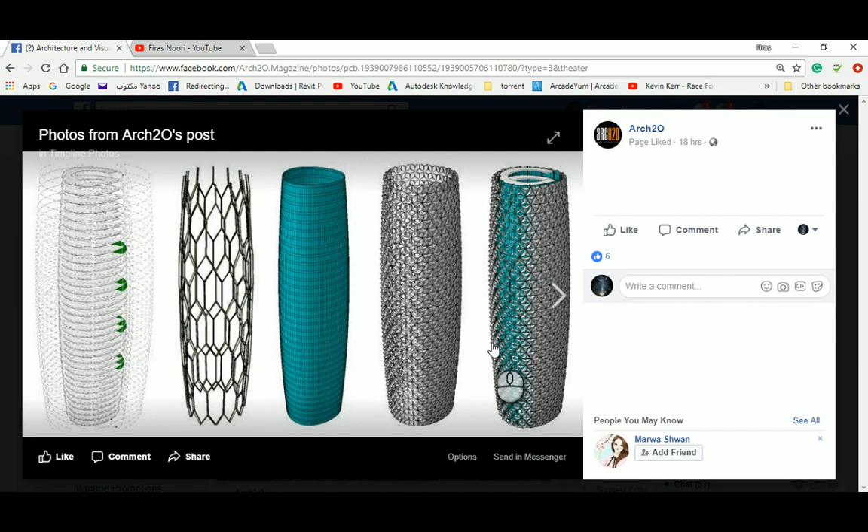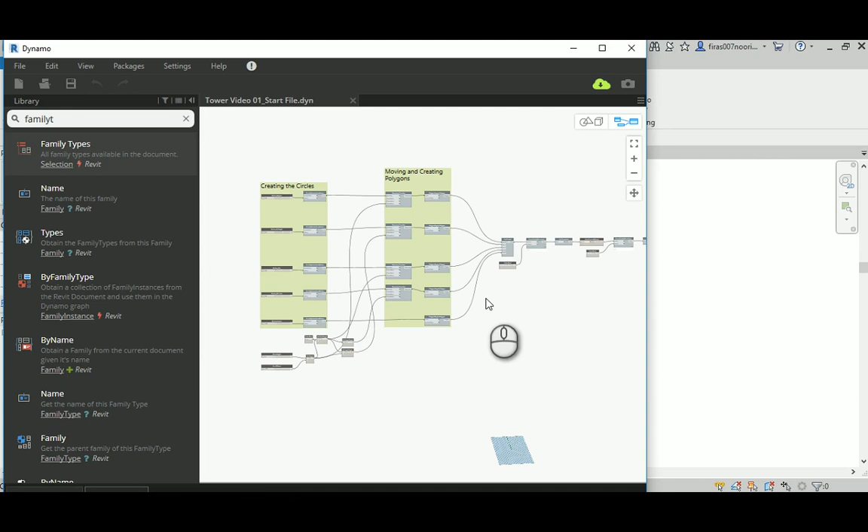So subdivision, again, if we come back to Revit, could be very complicated, and it's very annoying actually if it doesn't go well. In today's example, I will start with the previous work that I did. So if I open this in Dynamo, it's a basic tower that I had in the couple of videos that I've done, and let me just run that quickly. So that's the tower. And I ended by making this as a solid by loft.

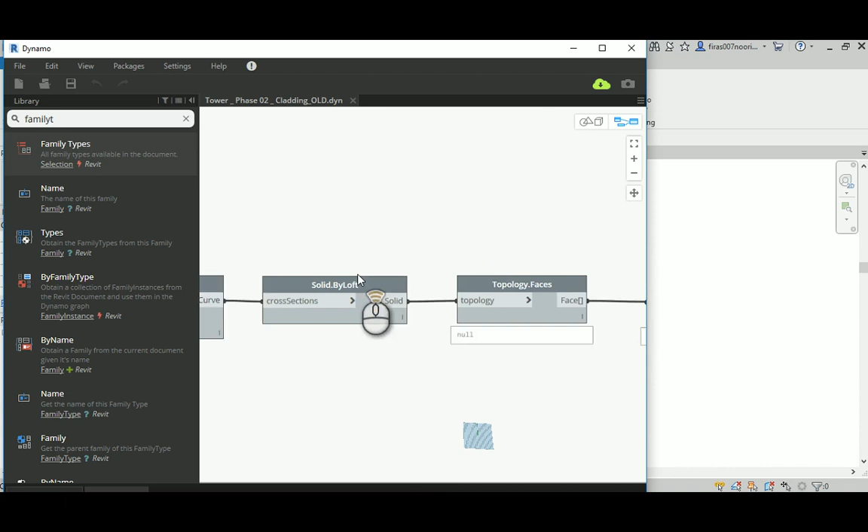So before I go ahead and show you paneling and dividing that, I need to show you the previous method, where we depend on topology. So that's the node for the solid, and then we added Topology.Faces, and then from the faces we took the surfaces, and then we used the drop list, and then on the surface we used panel quad, and divided it.

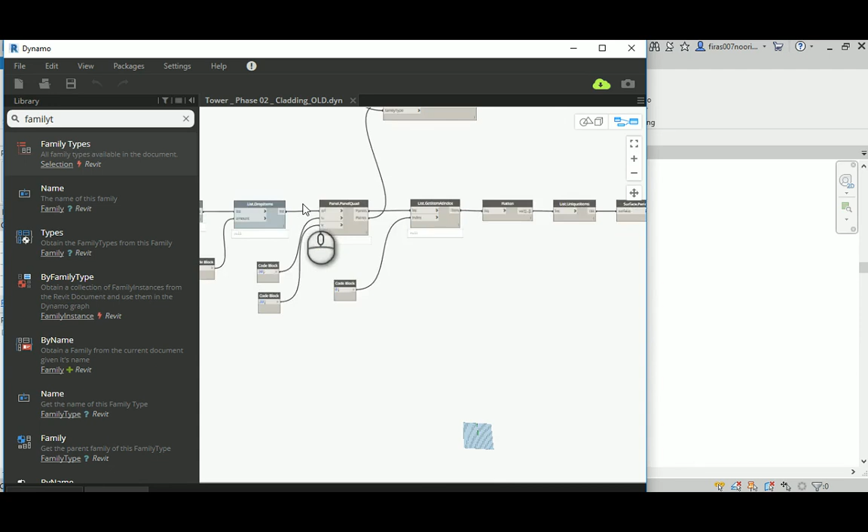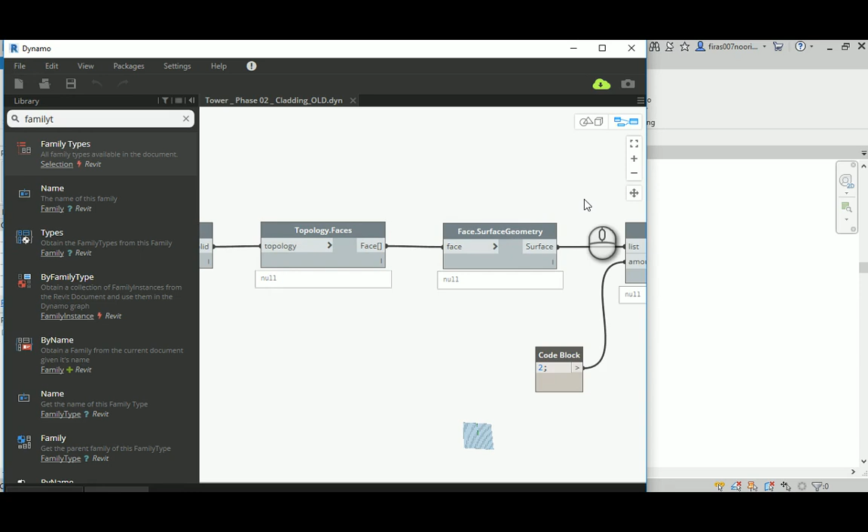So I depended on this in like 4 or 5 videos, and showed you how to take from the solid the faces, and from the faces the surfaces, and then deal with the surfaces by doing the paneling. So if you want to do paneling, there are several ways. So let me show you this way.

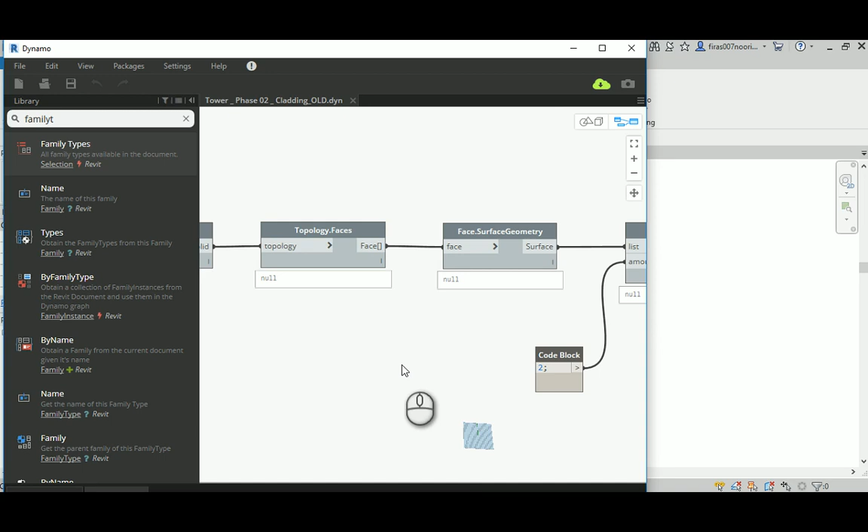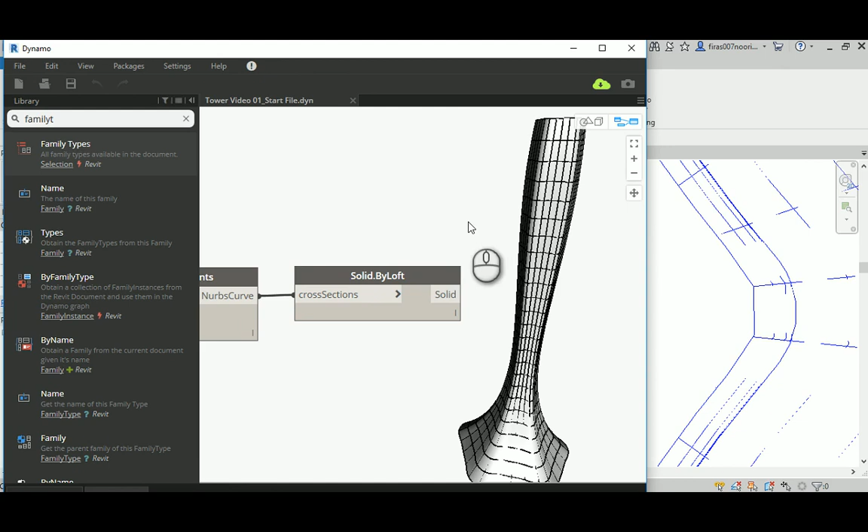I'll start with the file that I showed you. This is just a solid by loft. I'll run that. It's a really good idea to keep it on manual as long as you are pushing elements from Dynamo to Revit. It would be smart not to make it automatic, because it's going to cause a serious delay. If you're working in the Dynamo environment, you can keep it on automatic. Now let me add something new here.

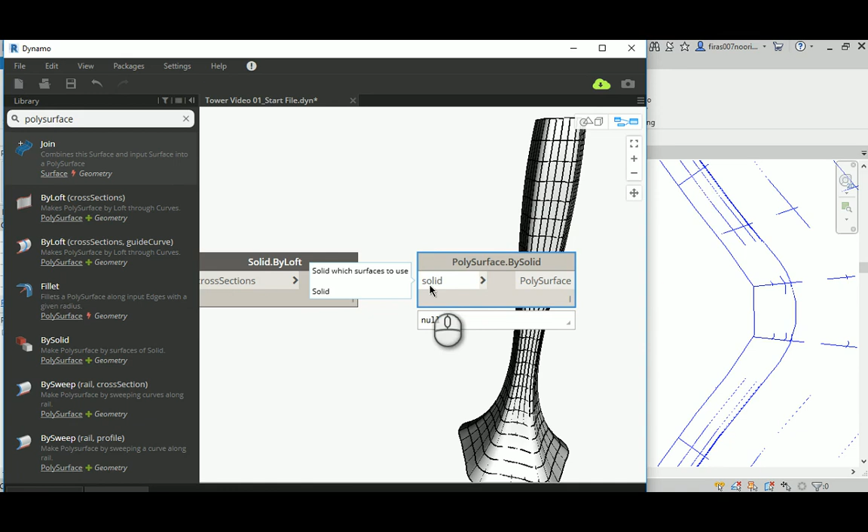Let's go for a poly surface, and that one, if you have a look, it's gonna take your solid and get the poly surface out of it. So the input is the solid, and it's gonna give you a poly surface. So let's run that, and by creating the poly surface for this solid, it's actually gonna make 3 surfaces: one for this curvature, one for the upper face, and one for the lower face.

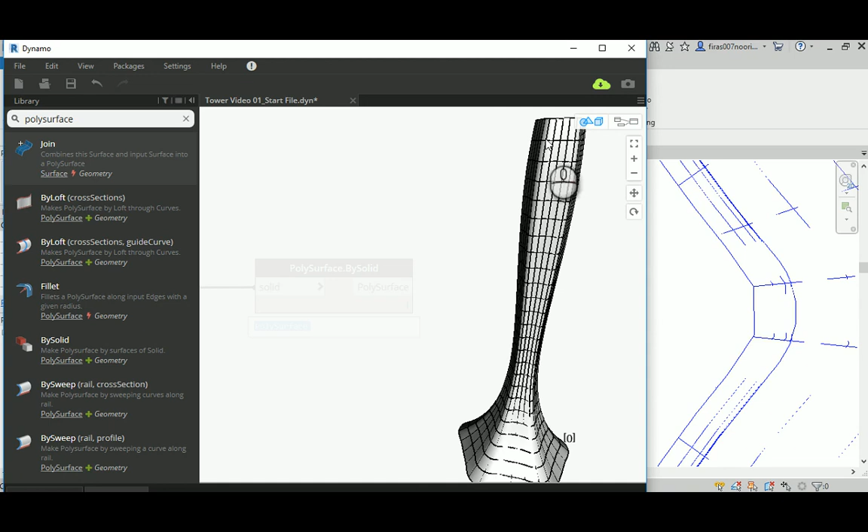But the problem in this, let's open that. This one is basically the whole thing, the whole surfaces, the 3 of them, which is the upper one, the lower one, and the base. So we don't want that, as we're not going to divide the top and the bottom surfaces. So we need to get this poly surface into normal surfaces.

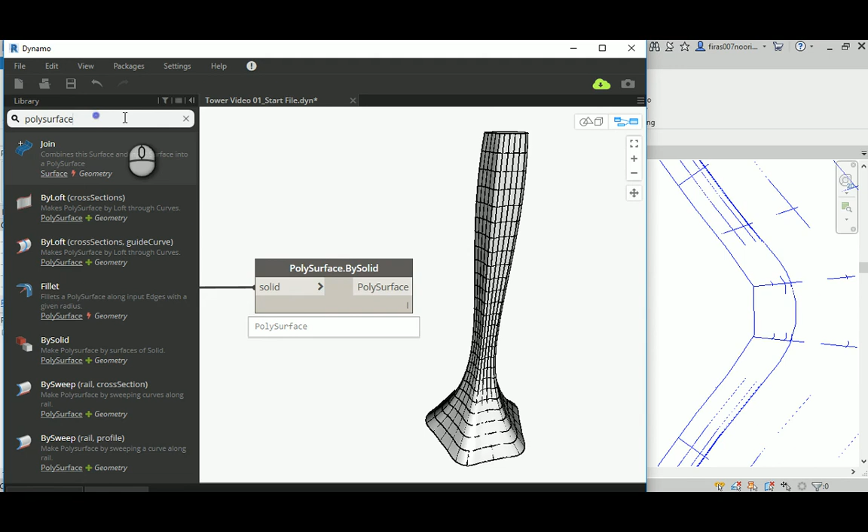So in this case, I'm gonna add again PolySurface.Surfaces. This is gonna take that poly surface and allow me to divide it into the normal surfaces that I need, which is technically here 1, 2, and 3. So let's have a look if we are going okay. See, that's number 3. That means so far so good.

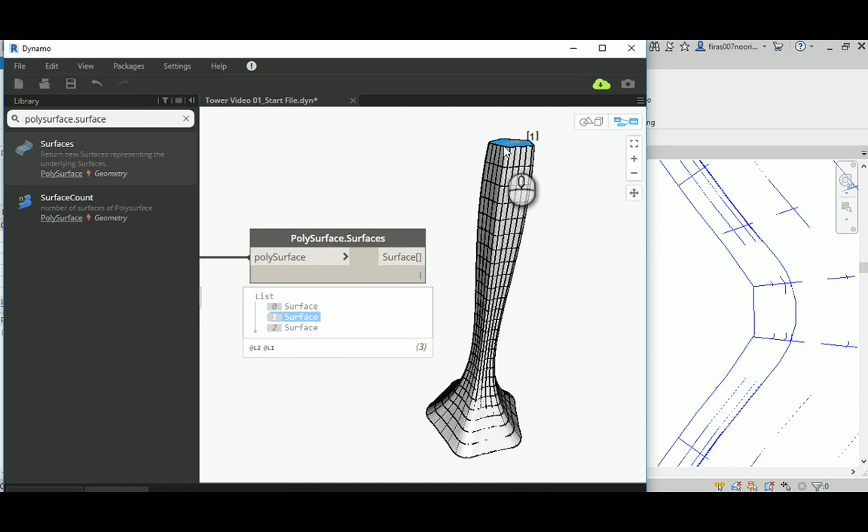So just test that. Let's select this one, which is the cap here. This one is the top, and this one is the surface that I need to divide. Now be careful. If you click on those and you don't see things, it might be a good idea to go back and cancel the preview of those, and that allows you to see them better. And that's again number 2. That's the one that I want.

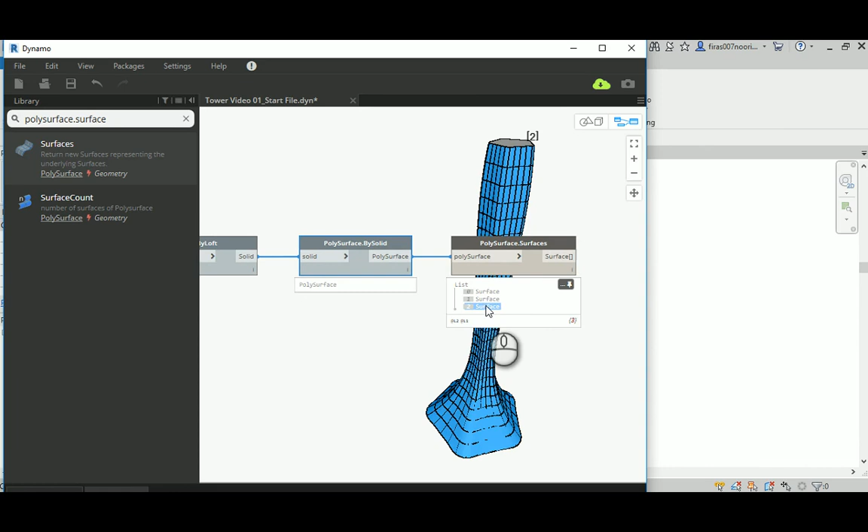And remember, all the divisions you see here, I just added them for the modeling's sake. So you can go ahead and turn them off, and those too. So in the actual understanding of surface work, that's what you have in Dynamo. That's how Dynamo thinks about it, and that's the surface you are going to divide.

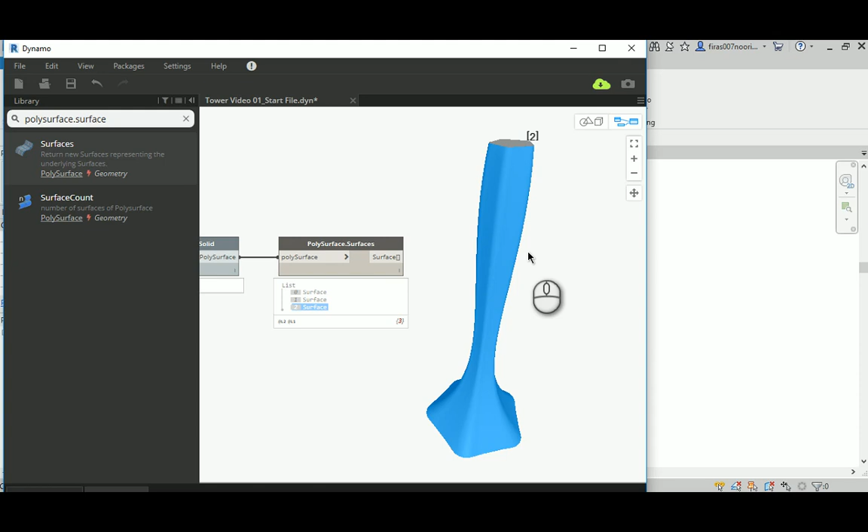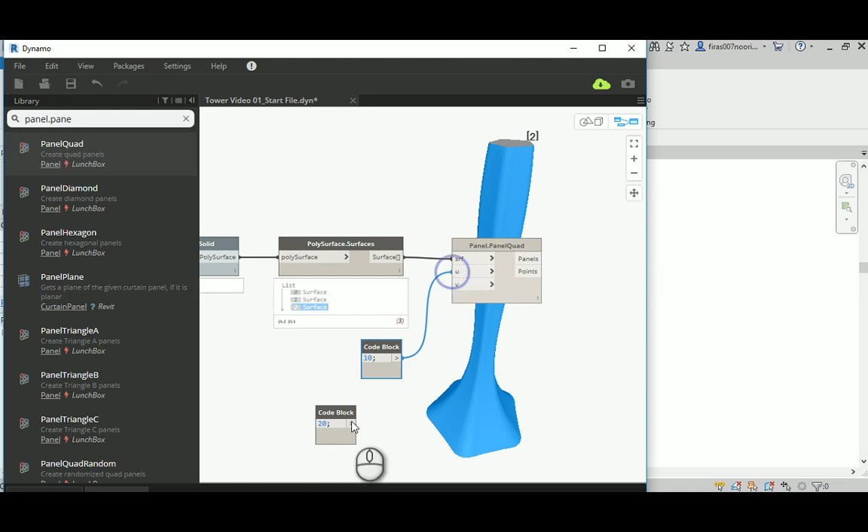So let's do that. And again, I'm gonna use Panel Quad, and it's really easy. I'm gonna take this guy here, the surface, and probably I'm gonna need 10 here and 20 here. So that's the 10, and that's the 20. Now if we divide that, it's gonna make that into smaller surfaces, 10 in the U direction and 20 in the V.

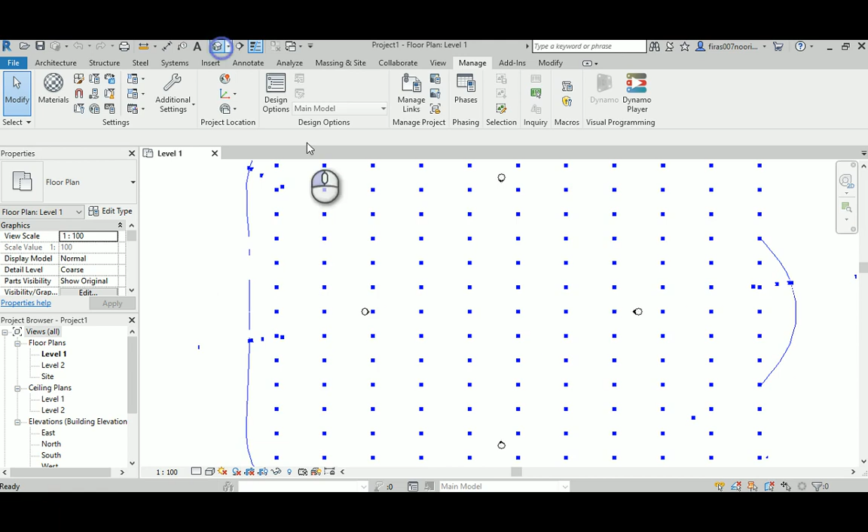Don't go ahead and add too much, even the value that I added. If you don't have a really good machine, you can go smaller, and I'd really advise you to do so. Anyway, let's have a look. So again, when we divide that, you can see that a mess is a mess. It divides that surface, and that surface, and that surface, because it's 3 surfaces. It doesn't recognize that we want only this one, and that's normal.

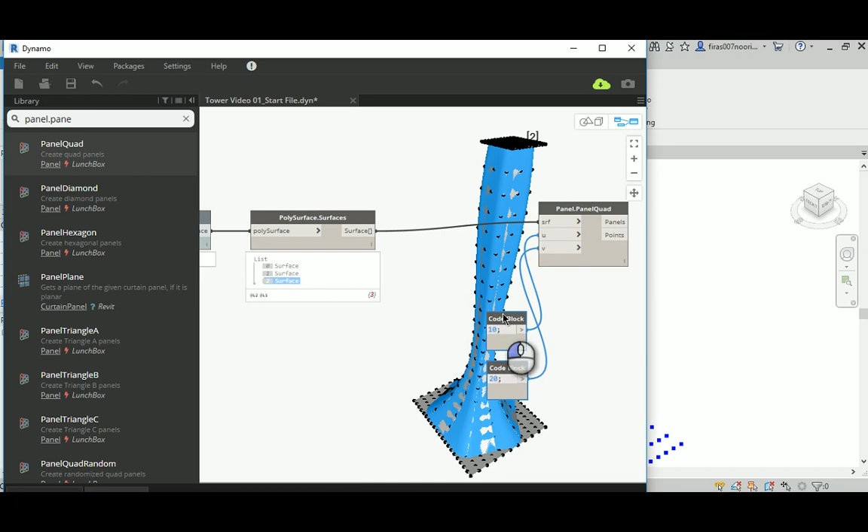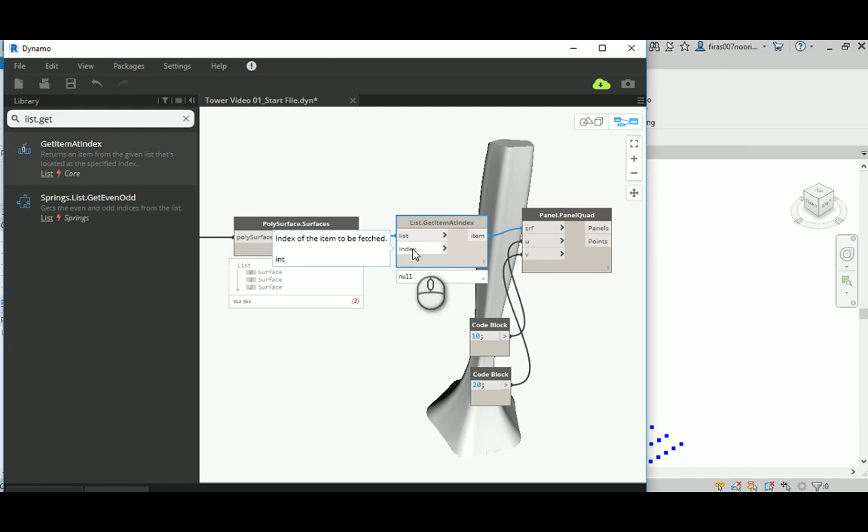So let's push that aside, and let's pick only one surface, which is the second one that I selected here. And I'm gonna go List dot, sorry, GetItemAtIndex. So I will take this here and give that to that one, okay? And the one that I need is the second, so I'll just write number 2 here. Now before, let's just turn off this. Now we run.

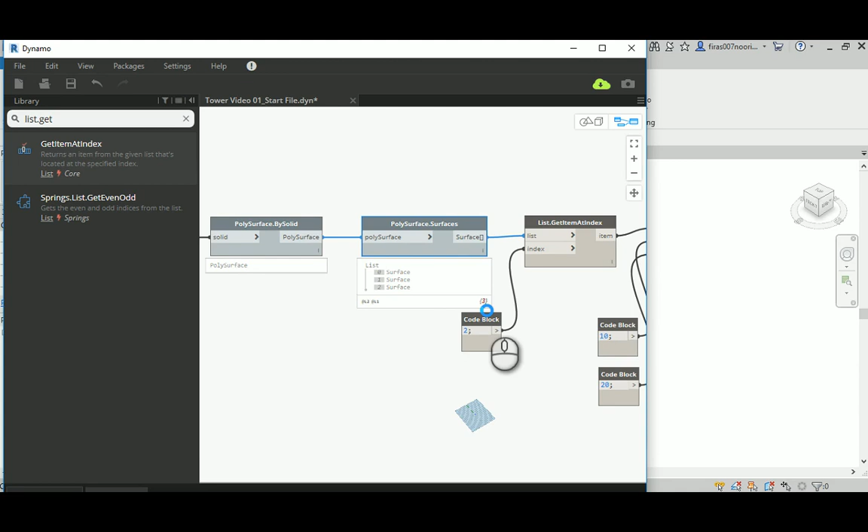In this case, I'm gonna deal with the second surface, which is the one that I need, the vertical one, and Dynamo will ignore surface 0 and surface 1, and that's actually what happened here. So that's technically what we need. So again, I'm gonna go back, turning those off. That means we selected just this guy, and you see those empties, the caps. That's technically the right thing to be done.

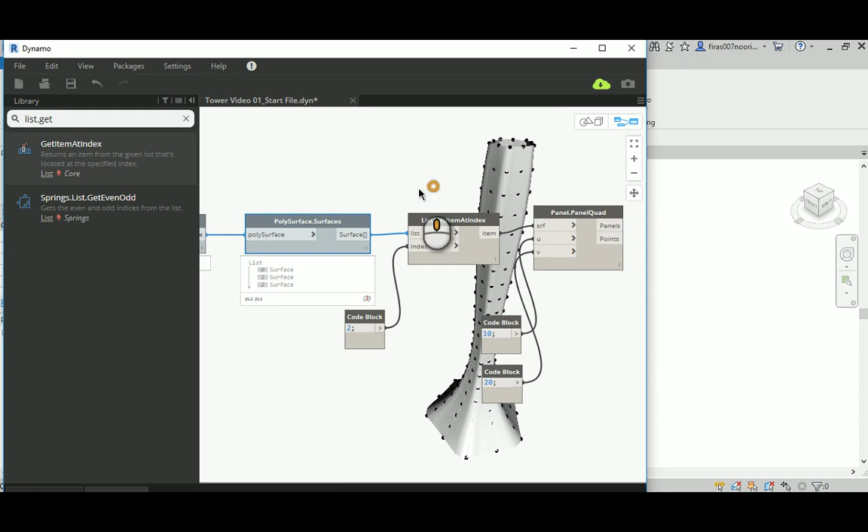And now, if you look, by accident, when I select the panel, I can see there are 2 surfaces. One, the NURBS one that we selected right now, and the other one is the result from the Panel Quad, the divided one. So just turn off or cancel the preview for this one. That's what you want, the paneled one. So that's the realistic one.

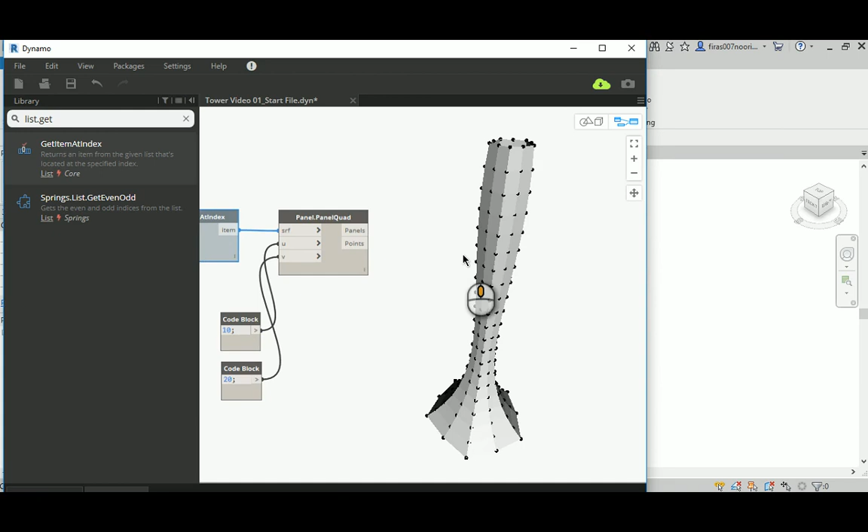You see that smooth curvy one, you're never gonna get it until you increase those insanely high. So again, that's for testing purposes. You can go ahead and increase those carefully after you finish the work. So now we managed to divide that, and we have our panels and our points ready.

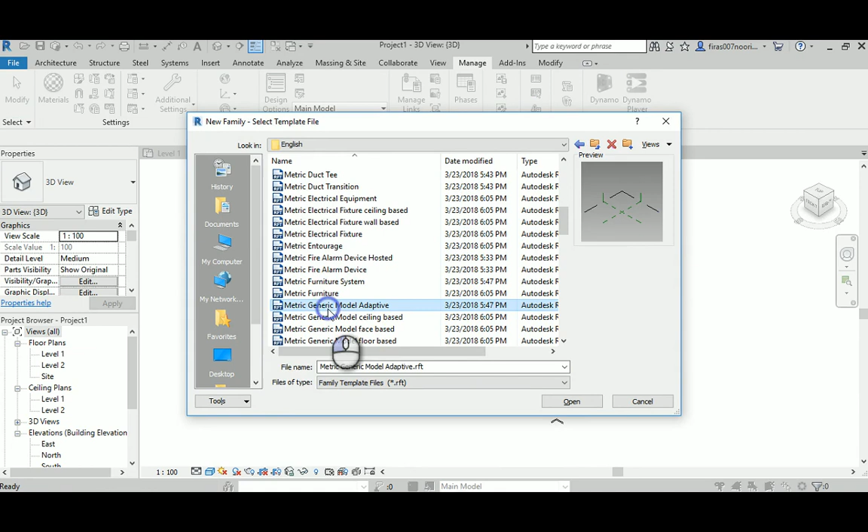So now you go here, open Revit and open a new family, and this family would go to the English metric system, and I will pick adaptive component. That's my adaptive component here, the Metric Generic Model Adaptive.

So it's a point base. It's not the curtain panel based that we use in the cladding. So I'm gonna take points, and that's number 1, that's the second, that's the third, that's the fourth. It's good to remember how you added the points, so the sequence of them is really important.

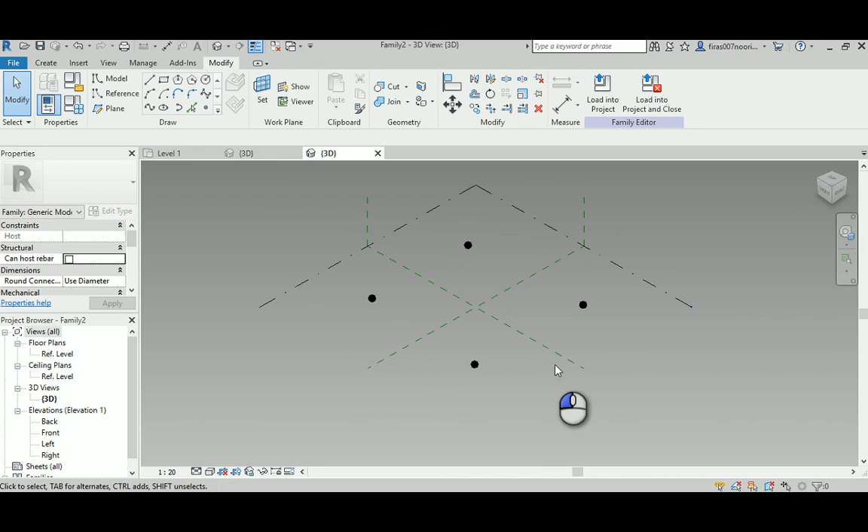Now they are just normal points. It's not really enough, so you have to select them and make them adaptive. So that's number 1, 2, 3, 4. Again, make a good memory of those. You need to remember how they actually have been created, or the sequence of them.

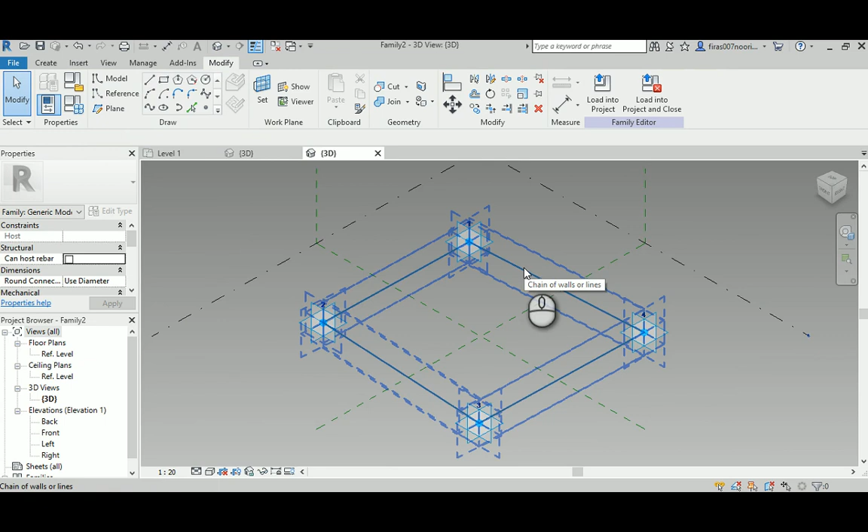I'll go referencing, and I'll just make sure that the 3D snapping and chain is on, and click 1, 2, 3, 4, and we end. So following those, and right click and cancel. Follow the sequence you create. Now if I just extrude it, it will work perfectly for the normal, if you can consider that as a clad, because it's just one panel.

Now, in order to create the subdivision, imagine that this is the surface, and then you need to create another surface inside, or this is the geometry or extrusion or whatever, and then you have to create another object. So it's just multiple objects, or more than one division in the same panel. And that's why we call it subdivision. So we need to divide that again, or make another object inside.

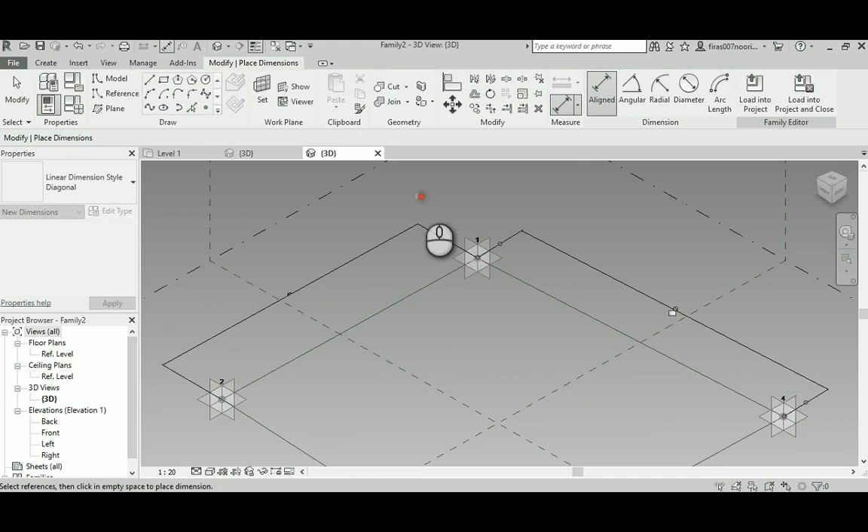But before, it would be very wise to add some constraints or some dimensions. So I'll start from the point to 1, and add this one to this one, the fourth to the first. And now that's important because actually paneling in Revit and even Dynamo need to understand what type of dimension is this and what type of dimension is this.

So it would go for instance, of course, because each panel will have its own length as a dimension. That makes sense. And then, this might be new for you, you go for making it a reporting parameter. So Revit can extract the actual value of that and store it, and then use it to create anything else that depends on it. So you must make that an instance, and you must make it reporting. That's really important, that step.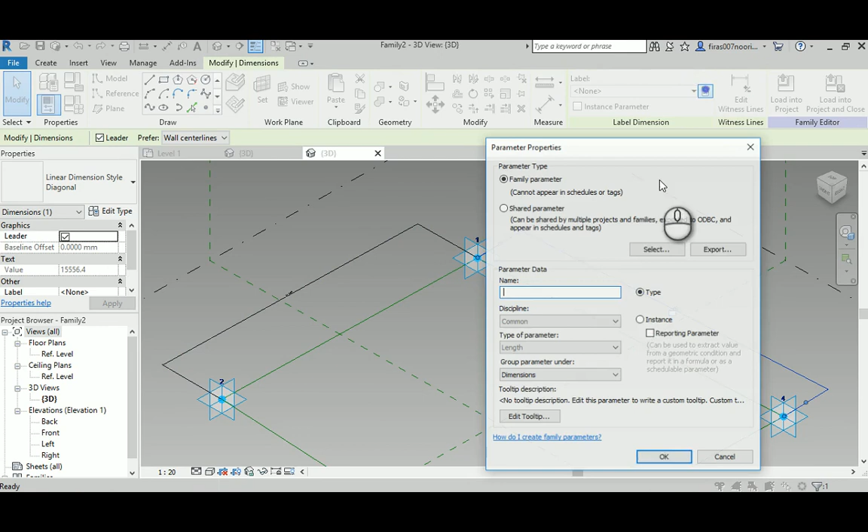And now I'm going to repeat that thing here and go W and go instance and reporting and go OK. So you can go ahead and add here and here, but I don't really need to do that because I'm pretty sure that in my geometry here, the left side and the right side of each panel will be the same, so I don't want to bother actually.

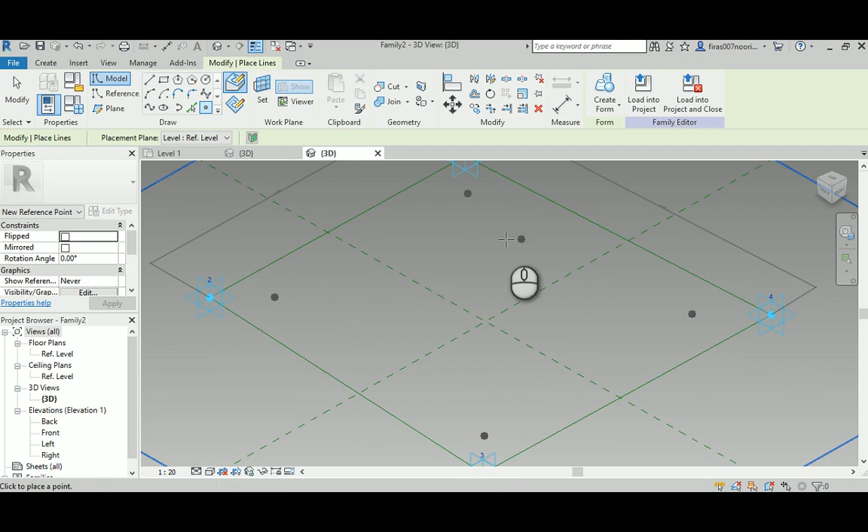So now I'm gonna add 4 points, and remember that's 1, and that's 2, that's 3, and that's 4. Now those guys are just points, and here they call them reference points. Those guys, the ones that have the planes, are adaptive points. So those are the ones actually going to change to suit the geometry or the subdivision or the paneling you did in Dynamo. Those guys have to follow them.

If you make them adaptive, it's really not a good idea in my point of view, because that means you are creating an 8-point panel. I just need a 4-point panel. The panel is defined by how many adaptive points you have, not by the number of points you have in it. So I'll keep those as normal reference points.

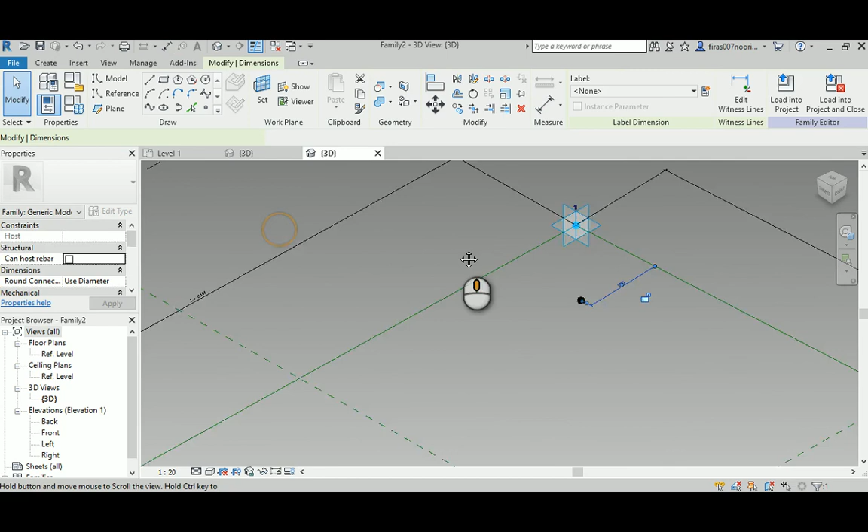So now I'm going to add dimension. So I'm going to add one here, and remember from the point to the line, not the other way around. So the point will follow the line or the reference line. Now that guy here is technically part of this. Okay, let's make this an offset.

Okay, so whatever the number, you can just add another parameter here, and let's call it offset from L. Again, it couldn't be a type because the panel itself will be getting smaller and bigger, depending on where you're going to put it in the size of the subdivision, the paneling you have in Dynamo or Revit. So type is not the thing you need. You have to make it just an instance, and that's what we need.

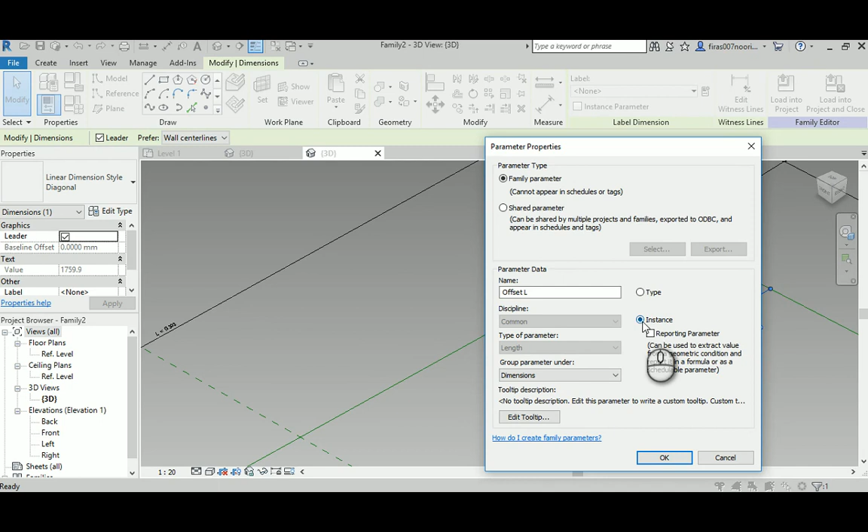And I'm going to go OK, and then in the family type, I will go and define how much it is, and let's assume it's L over 10. So I'll hit OK, so it will be 1 over 10 of the value of that. So now I can select all those guys and assign that parameter to them. So this point and this point will be 1 over 10 of the whole thing, and this will be 8 of them. Now we do the same thing for this.

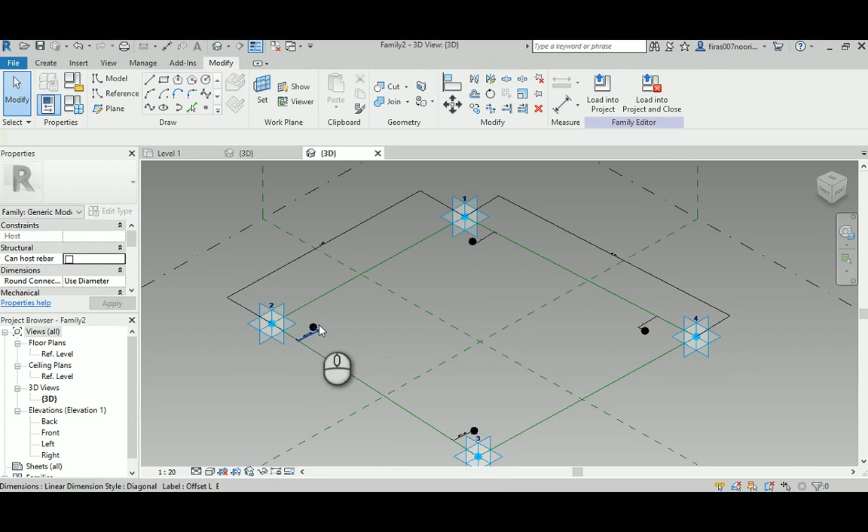So that's 1, and that's the second. And again, from the point to the reference line, and oops, and now this will be part of this guy, which is W.

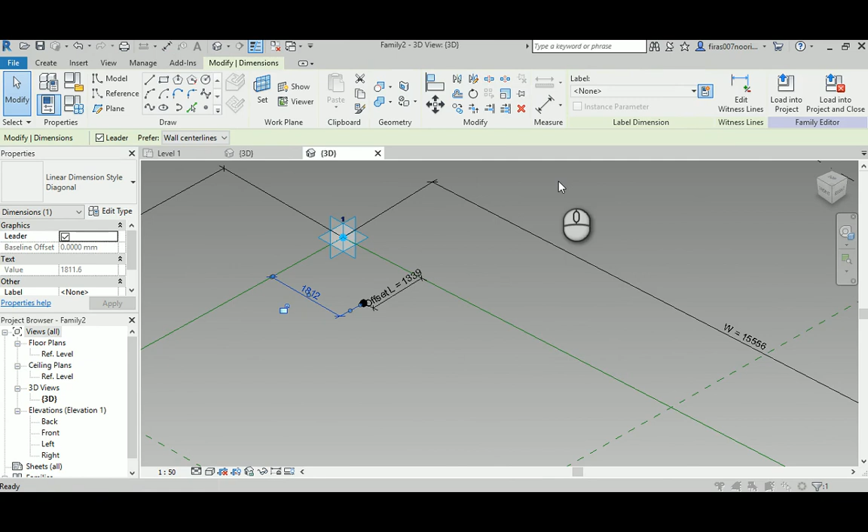So this one will be part of L, and that will be part of W. So create a parameter, and I will call it again offset from W and its instance, and I will define its value from the reporting W parameter. So yeah, sorry, it's W divided by 10.

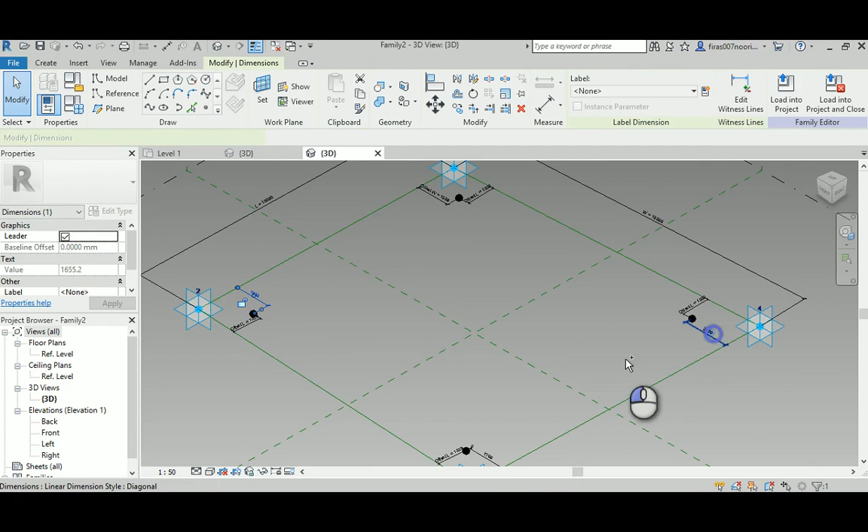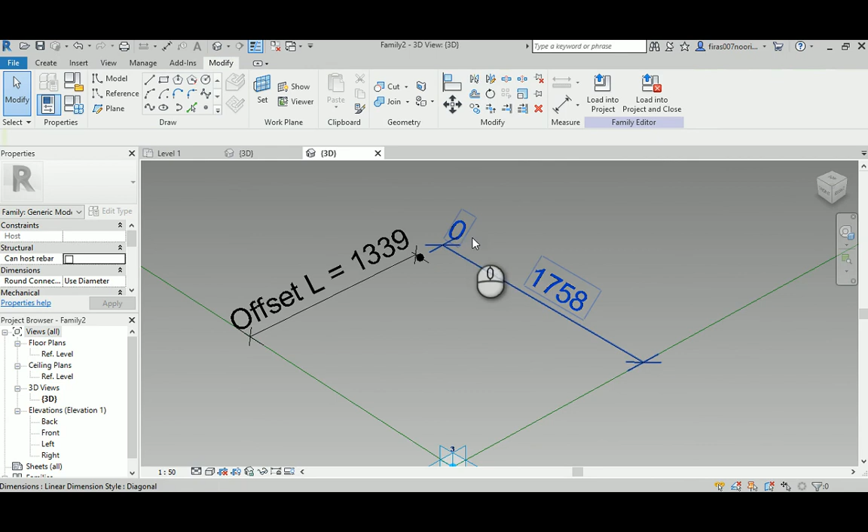Now I'm gonna select those three, the remaining, with control, and I'm gonna assign the W for them. Oops, I made a mistake. We gotta assign the offset for them, sorry. Something is not going okay, so this one, okay. This one, beautiful. Now this one, oh, this one is wrong, see? Accidentally I created two, so get rid of this naughty one.

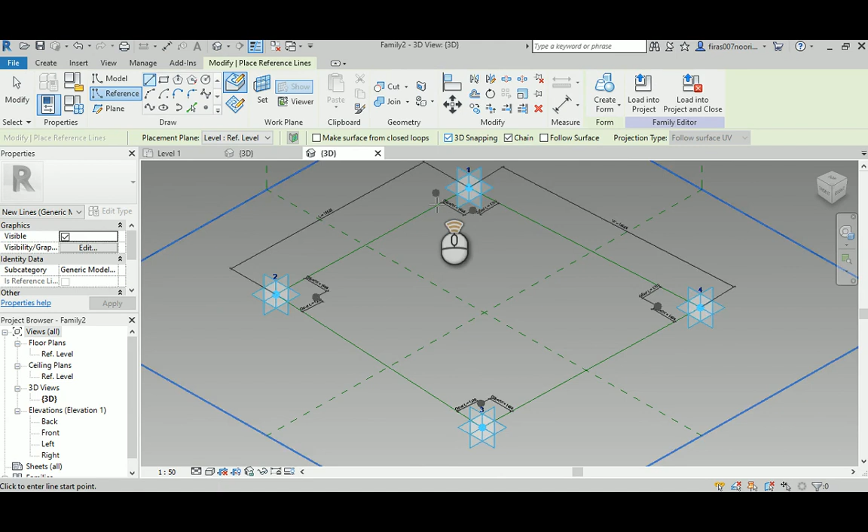And make sure you're selecting the point and the line, the reference line, and then do it. Perfect. Now that's what we have. Now again, reference lines here, and it's another chain and another 3D snapping, and you're gonna start from this again, 1, and then 2, 3, 4, 5, and then you close. By cancel, I will go ahead and save that.

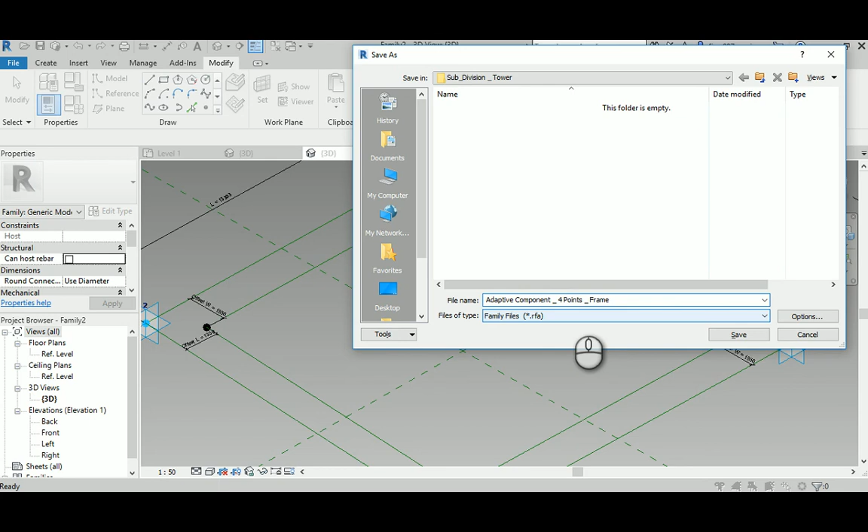Let me call it just frames. Let me call it adaptive component. It's point based, and let's go 4 points because it's a 4 point based panel, and it's just the frame for it. It's not really ready, sorry. So not ready. So I'm gonna save that.

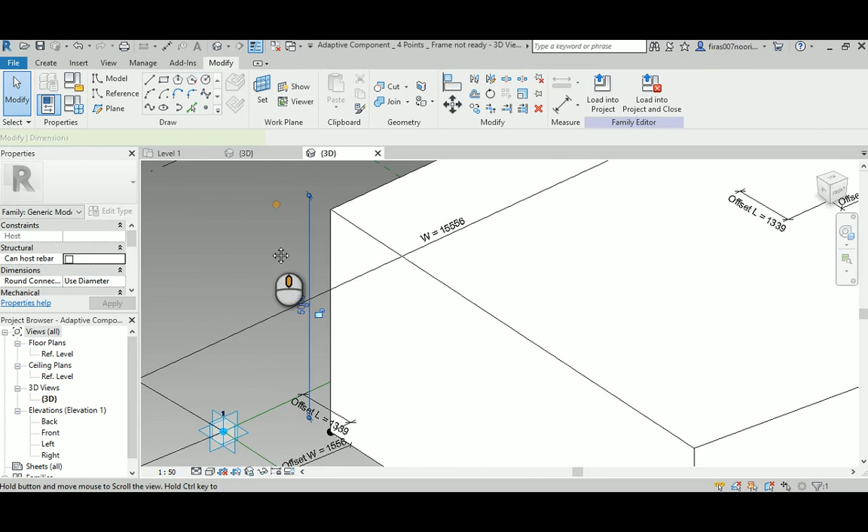Now I can go ahead and select that one, just simply extrude it, and go here, change this into a dimension, and then add a parameter here. Let me call it H2, and I will keep it as a type because it's gonna affect all the panels in the same geometry. I need to control them manually, and the change that I do once for one panel should be reflected back to the whole geometry. And remember, you need to control that manually for all, so that's why you have to keep it type.

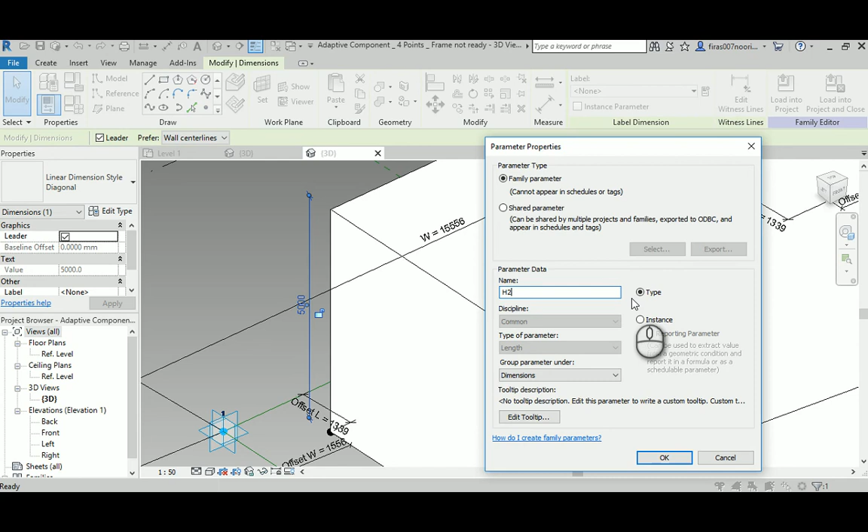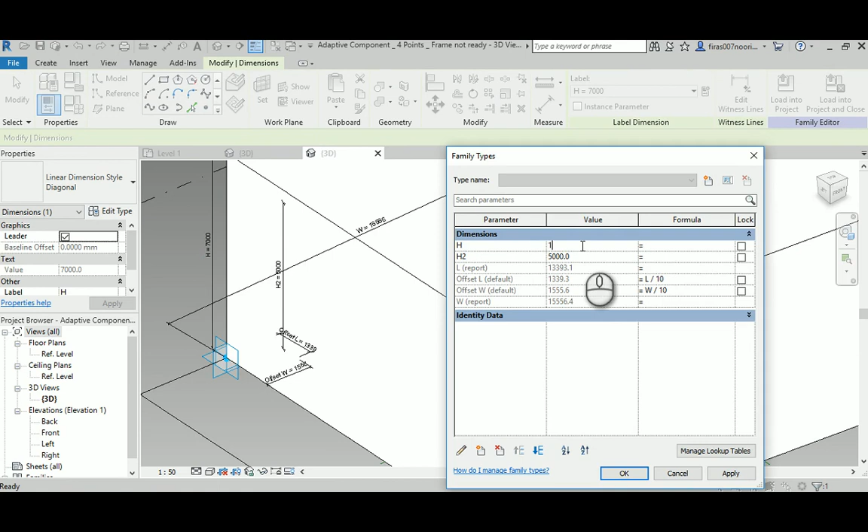And then you need to select this one, and then again create a form or solid, and change that, and then select it, and then add a parameter. Let me call it H, it's a type again, and I'm gonna make this maybe 1000 or whatever. Hit apply and keep that, or just change it to 3000 or whatever you want. So now we go back and then save again, or save as, sorry.

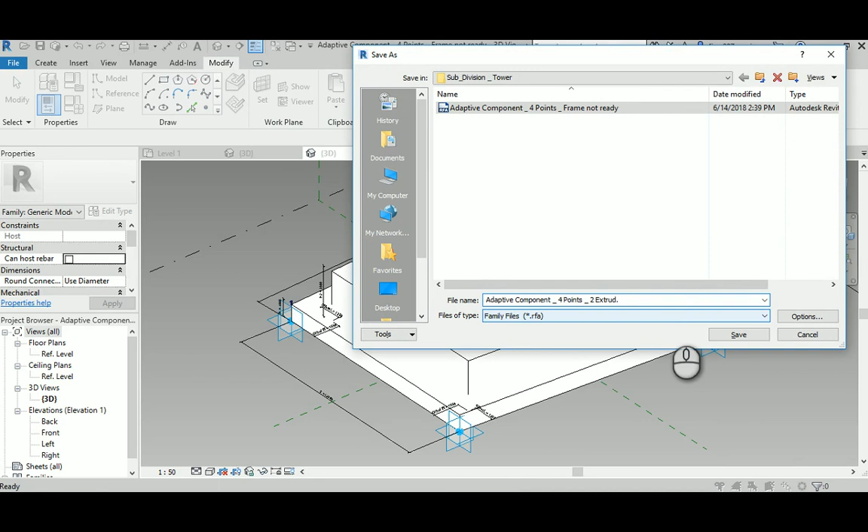And again, it's adaptive component, and it's 4 points, and let's say it's 2 extrusion. Okay, that's it. Let's save that, and then we need to load that into the project file. I'm just gonna cancel this, go to the 3D of that file. Now back to Dynamo again.

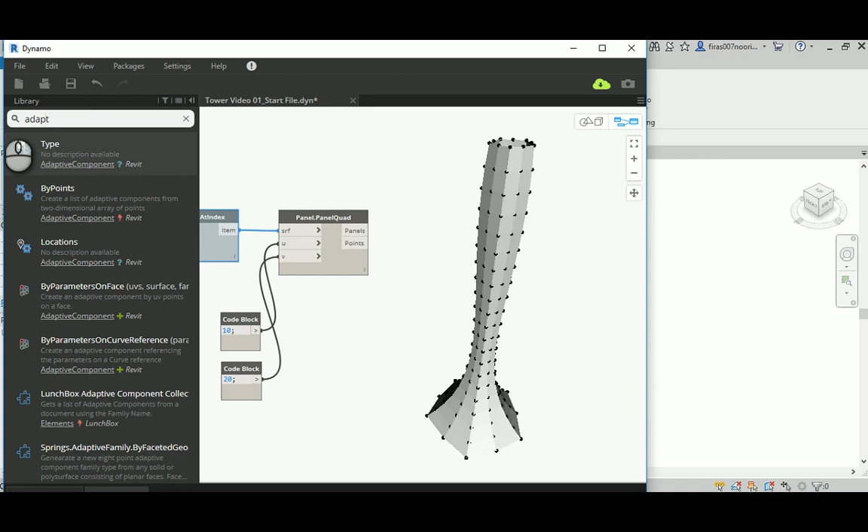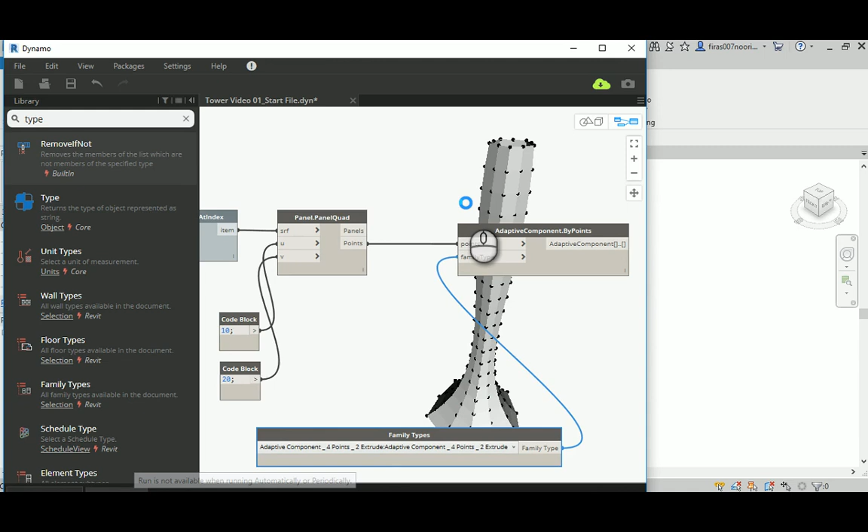And basically all we need is to make adaptive component. We've done that a couple of times so far. So by points, and you need a family type selector, and you go ahead and pick whatever you created, which is this 4 points and then 2 extrude, and connect that, and then go ahead and run. Remember that it's gonna depend on how many you add here as segments for the U and V and what type of machine you have.

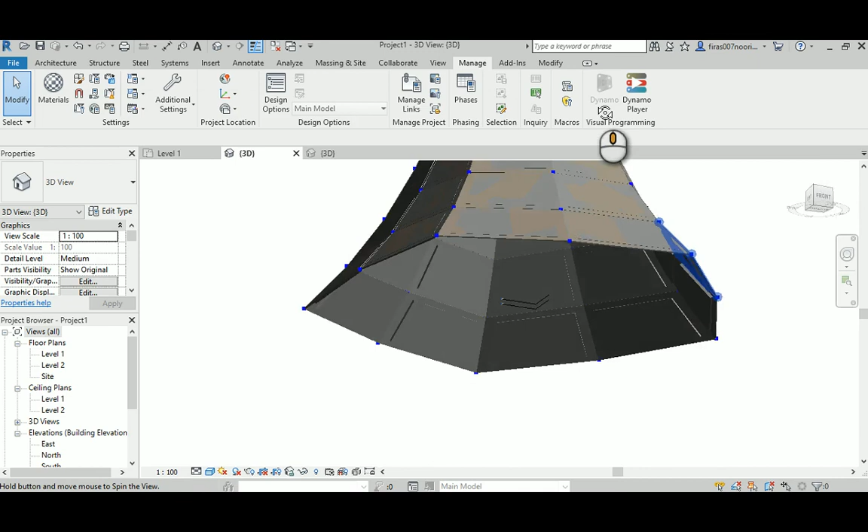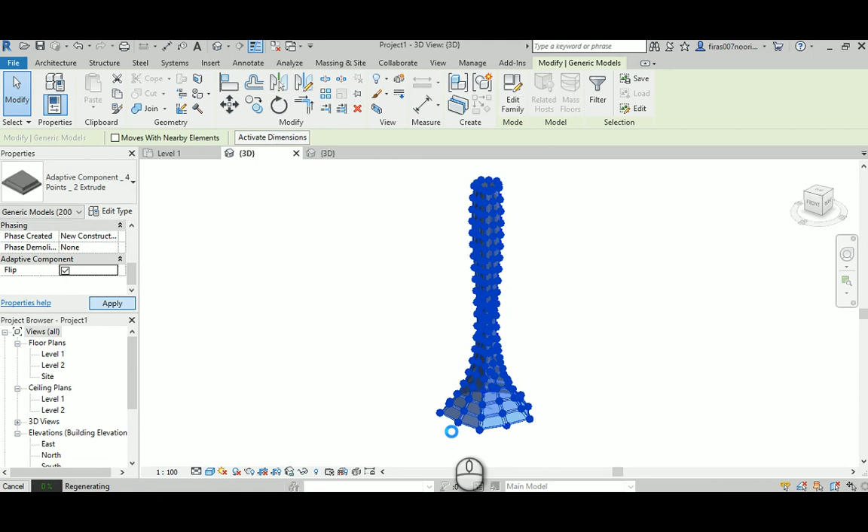So now that's basically what we should have, but it's obviously been flipped. Okay, you either go and add a reverse function or flip inside Dynamo, or go and do the lazy one, which I like: I'm gonna turn off the levels so I can select only the adaptive components, go back and flip it manually, and everyone will be happy. Now we are really in business.

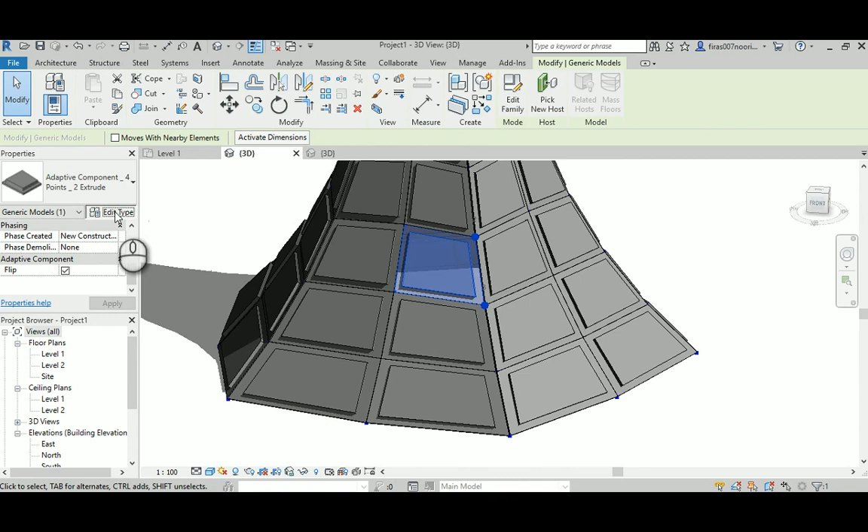Probably you need to add some shadow here, so you can see the depth resulting from those two subdivided panels that you add. I can select one and go and edit the type, and I can see the 1 and the 3. That's because they are typed, so you can see them here. And when you change the 1 here, let's say to 6, it's gonna affect every single unit that you added in this tower. When you change that, remember, it really needs to recalculate.

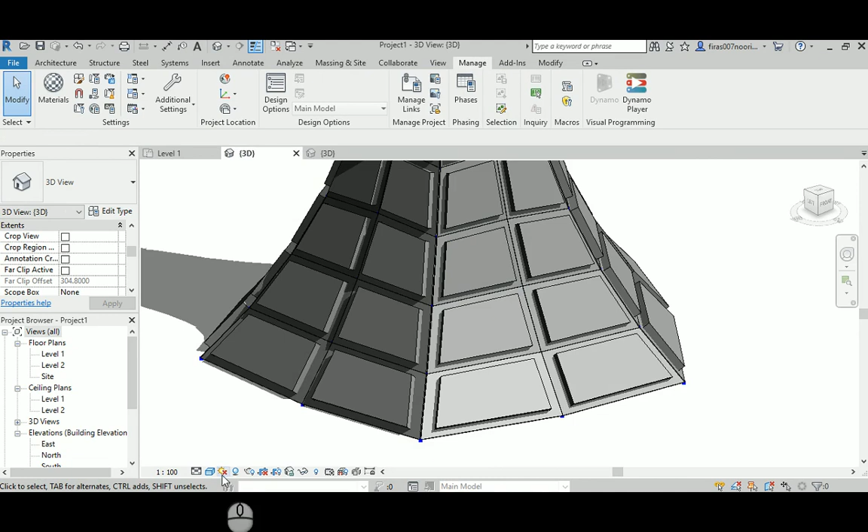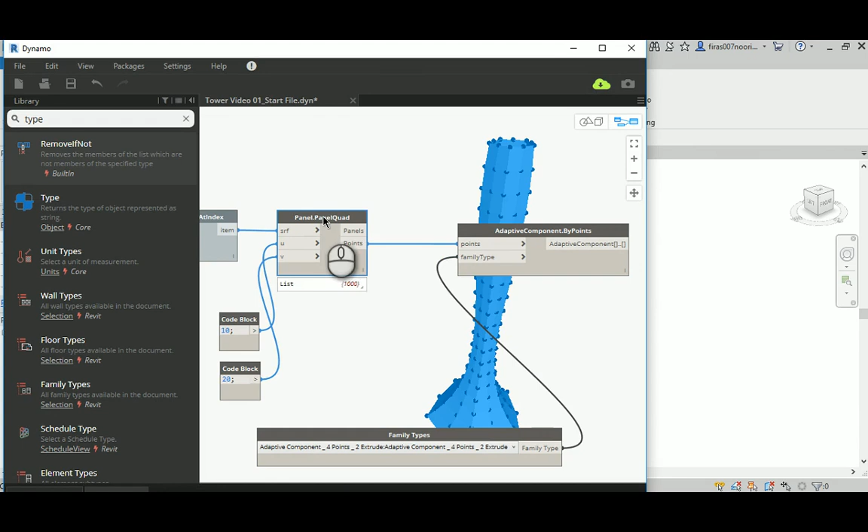So you can see that we've done actually a nice example of how we deal with this, and it could be a really good way to deal with a very basic subdivision for our panels, and it's basically offset subdivision. So if I go here, I can just turn off the points, maybe. Yeah, see, that's better, because this point is kind of annoying. So that could be it for this type of paneling.